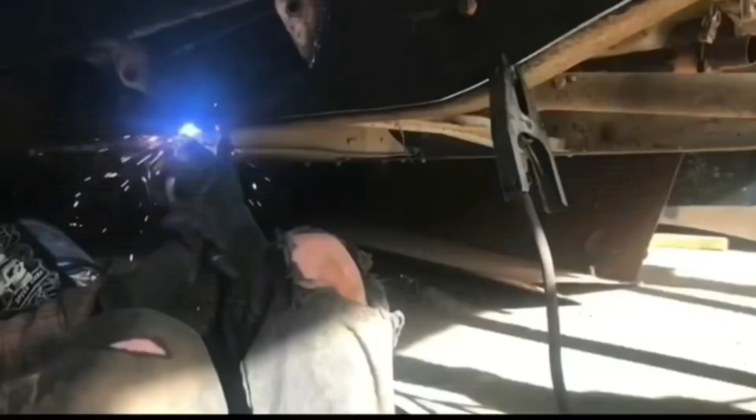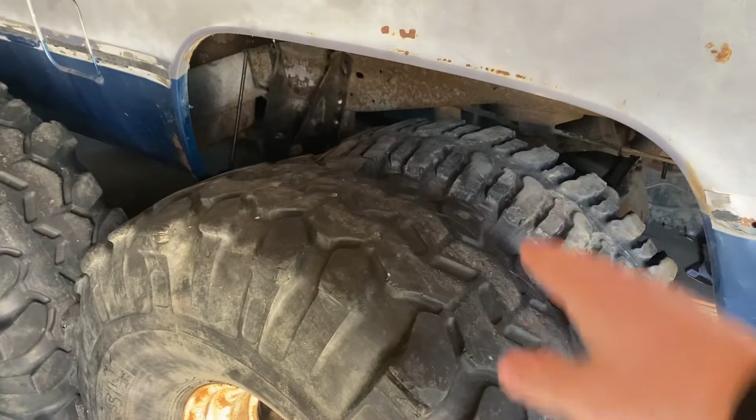But first, check out these I got for it. Now they're a set of 40s, even though they sit about the same height as the 38s. Got them for super cheap. First thing you'll probably notice, wrong bolt pattern. These wheels are no good for them, but they are 15s, so they will fit my nice chrome ones.

So I'll just have to swap them over, and then I think I'll clean up these wheels and try to sell them. The problem I noticed, as soon as I started bringing these home, is that one's different than the rest. I got 3 like this with the 8 spoke, and 1 like that with the 5 spoke. But I should still be able to clean them up, powder coat them or paint them, and go from there.

These are kind of bald. I mean, by kind of, I mean really. They're right down to the wear lines. I'm okay with that though, because I got them for super cheap, and they're just to kind of fit the truck, just to sell it.

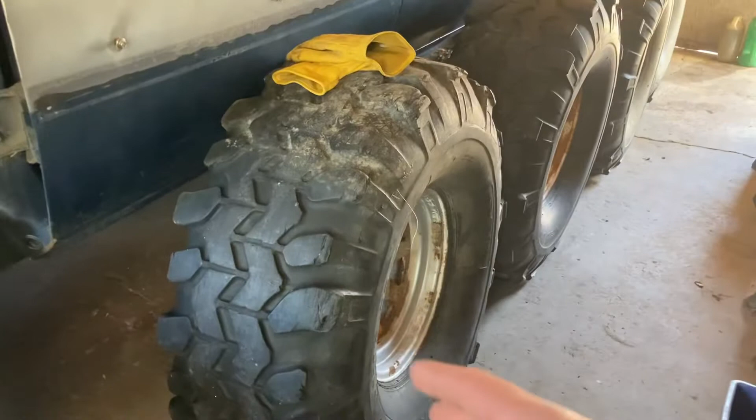I kind of noticed that with vehicles, if you're looking for a little tip to sell something that's a big lifted truck, have some big tires on it. Don't have it on the dinky tires. People think it looks stupid and they tend to not buy it. Even if they're big bald tires, they can see the potential and the sheer size of it. It changes the size and the whole look. So I try to put some on.

A couple other things with these, they could be re-grooved. I could take these lugs out. I could cut this down, take out every other lug here or something. They're super swampers, and there's lots of ways to cut super swampers. I've never actually cut tires before, but I've seen a lot of it done. So maybe that's something these hold in the future.

Another thing is, if you remember, this is just a Dana 44, and it's a very heavy truck with a torquey motor. So I don't want lots of grip, at least not in the front. Normally, I don't know how true this is, but I've always been told you want your best tires on the front. Normally that's how I roll, but with these, I think I'll pick the baldest 2 and put them on the front so it doesn't grab as much there. I want as much traction on that 14 bolt as I can get, and minimal traction on the Dana 44. So I'm kind of thinking for selling wise of the truck and functionality wise if I keep the truck.

These aren't really cracked, except one, of course, the one I'm looking at. I haven't seen any cracks on any of them, so they should be okay for the road, except for this one. It's got this nice, horrible crack here. It's on the back too, so I think this one was flat at some point.

Other than that, they're pretty good, and apparently they hold air. I think that one's flat right now. You can see it's kind of flat on the top, and these ones are round out. But it is what it is. If I do drive this on the road, I'll maybe put that on the right rear. Hopefully have some better tires by then, if I keep this.

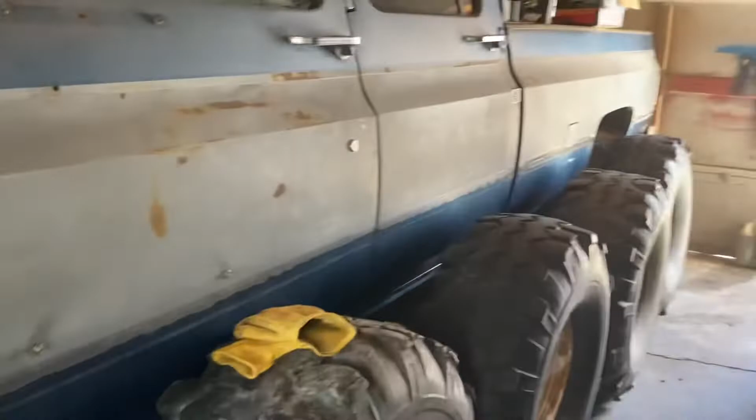But for now, got to swap these over and got to get the truck back together. I'm going to move these out of the way, and then we'll figure out a list of things I got to do on this pile to get it going. Or probably not even going, just at least somewhat together, a little more sellable.

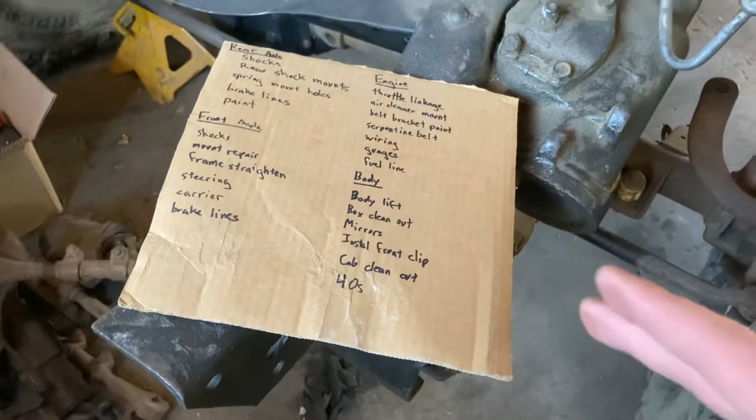Well, she's a long list, and that's not even all of it. That's just kind of what I want to get done here in the near future. And that's not even to get it running or driving on the road. That's not even the tow truck part. That's just

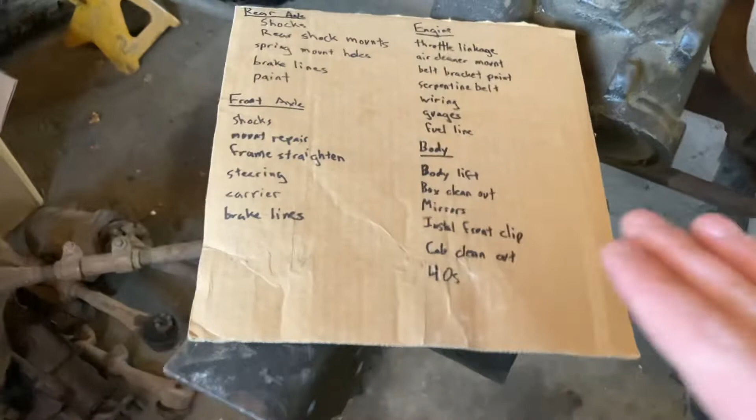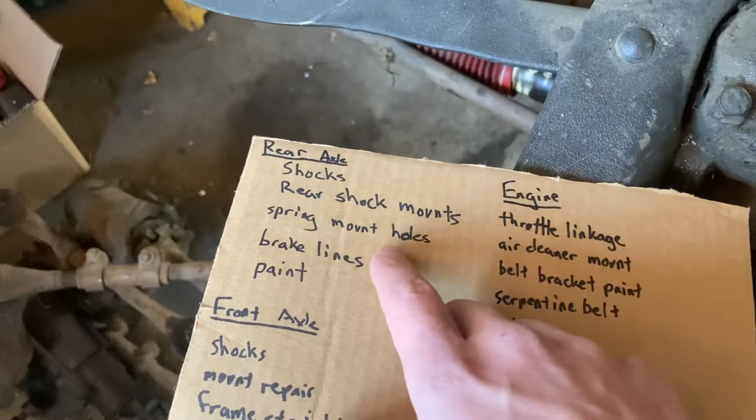step 1, I guess. At the rear of the truck, we got to do shocks, but first we got to do the shock mounts. They're the wrong way on the axle. We got to still drill all the holes for all the brackets that hold the leaf springs on. I do brake lines, and then kind of paint all the brackets and maybe even the diff, we'll see.

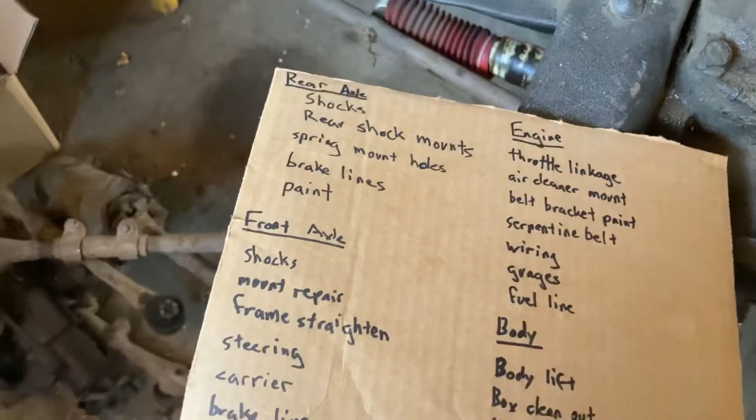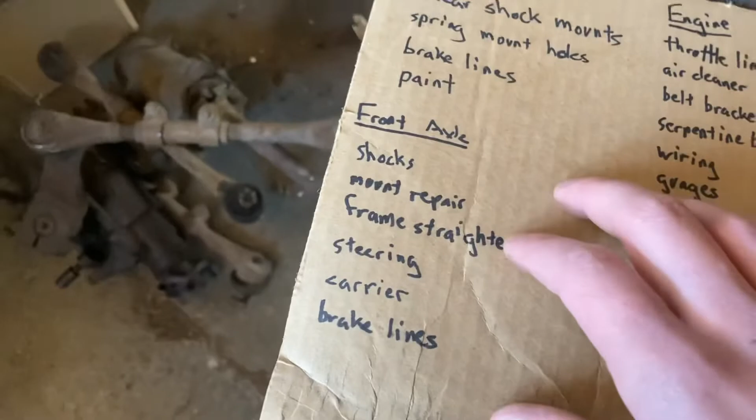Front axle, again, shocks. I gotta fix that crack. We got to straighten that frame rail, which will be done once more of the truck's put together and I can roll it outside.

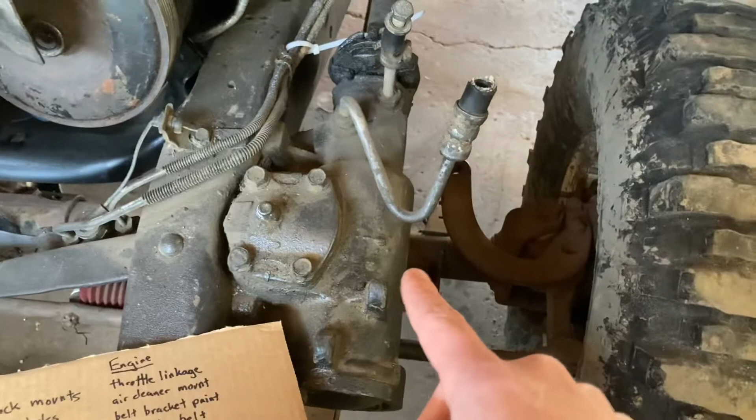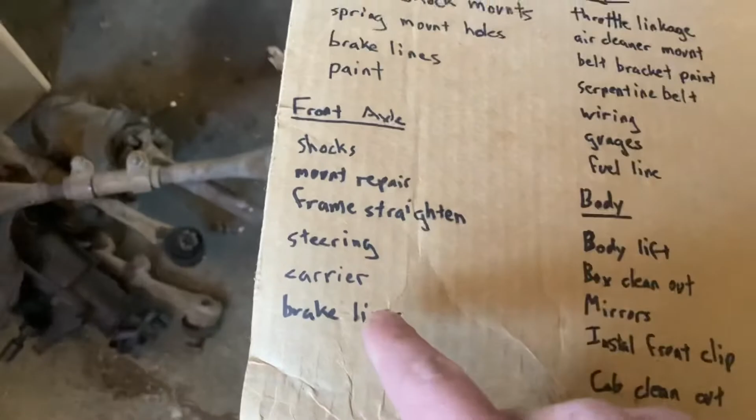We got to do the steering. It's still two-wheel drive box, and as you can see, it's not connected. The carrier probably won't get done for a long time because I need some money for that, and I don't have any.

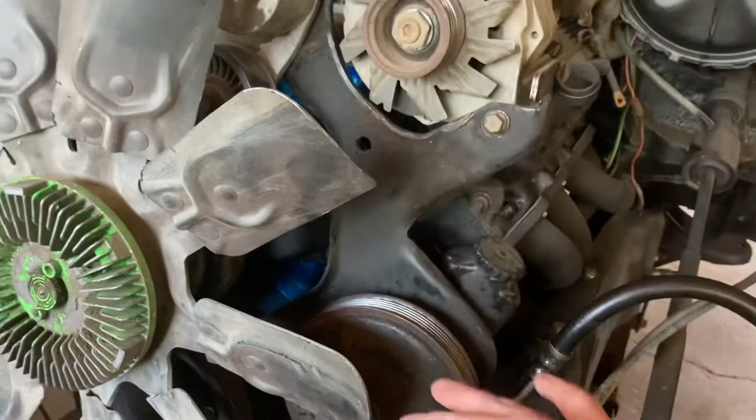And then brake lines. The engine, I gotta do the throttle linkage, air cleaner mount, belt bracket, paint, because all that's crappy. I'd like to clean it up. We gotta do the serpentine belts, all the wiring, the gauges, fuel lines, and then we might be able to fire it up after that.

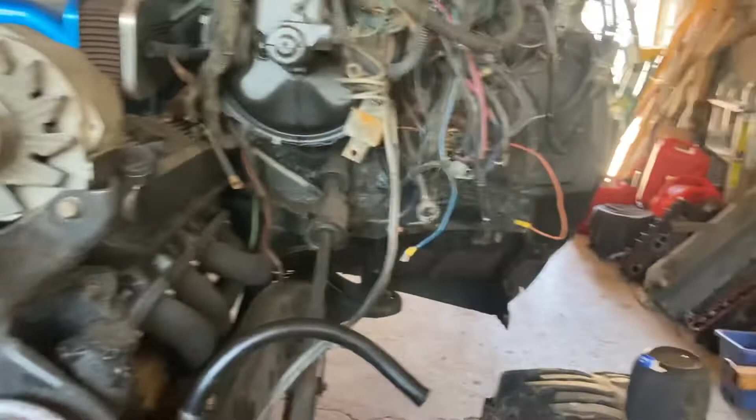So we might get this running, we might not for now, I'm not sure. It's still really cold in here for a cam break-in, so probably not yet.

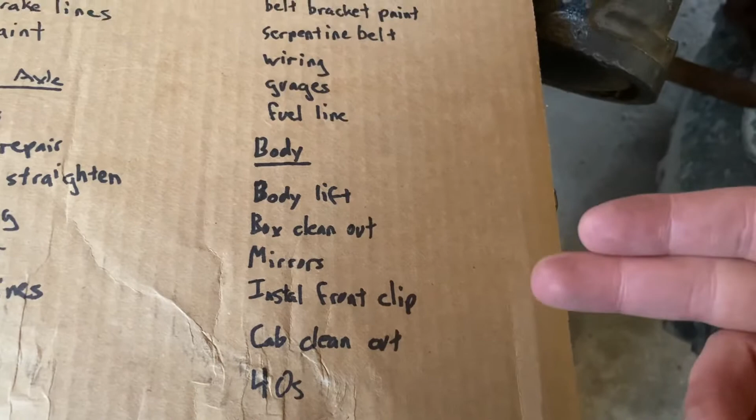And then for the body, I gotta do the body lift. I gotta get all the crap out of the box, and all the crap out of the cab. Mirrors. I'm gonna install the whole front clip so the truck's complete, and then put on the 40s I just showed you at the beginning of this. So we got a lot to do.

I guess let's pick one thing and get going. First thing on the list I think I'm gonna try to do is the steering box. Shouldn't be too bad. It's 4 bolts, 3 or 4 in the frame, and 2 on the rag joint.

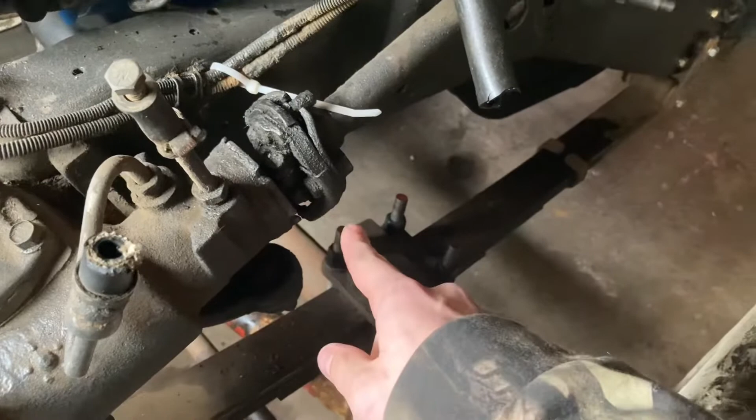A lot of times these ones have given me trouble, and then it should just be drop that off, bolt the new one on, run it into there, and it should be good in theory.

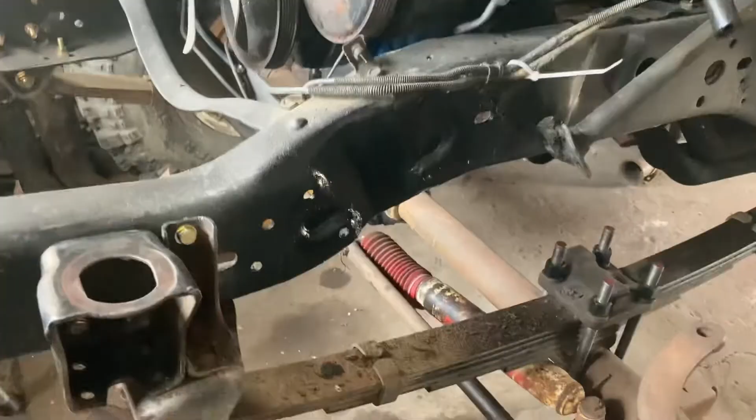Came apart nicely without really any issue. I had to tap on the one bolt with a hammer to let it go, but other than that, it came out nice and gentle.

I touched this up with some rocker guards so it can match the rest of the frame. When I get closer to being all finished with this, I'll touch up the front of this again.

So while that's drying, I'm painting the steering box outside to keep fumes in here minimal. And while that's drying too, I think I'm gonna start working on the front end.

I need to unbolt these again so I can paint them and fix that one. I could do it on the truck, but I'd rather take them off and paint them because then it looks nice on the inside and stuff, and it's less likely to rust. Plus I gotta redo all these nuts anyways with the nylocks.

So might as well just do it all in one.

New box is in. It looks so much better than that pile of crap there.

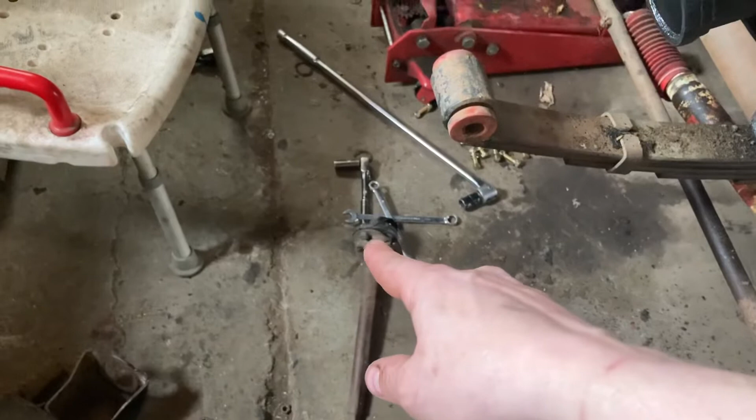I did have to switch the rag joint though. Now I understand why those bolts are not undone and they cut here on the column, because I could not get those off without stripping them out.

So I decided since it's only one bolt you can take that off, and it's actually a lot easier than doing the rag joint bolts. I should have just done it that way. Plus the rag joint from this truck was in a lot better shape anyway, so it worked out for the best.

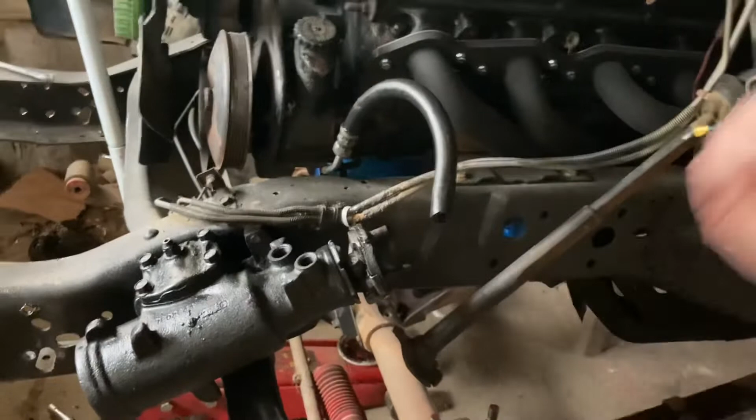I have not put this on yet. It's kind of hard to get it on there, but I'm not going to fight with it or take this off, because I still got to do the body lift, which brings this 3 inches higher. So it's about 3 inches lower right now. I'll raise it up and then I'll have the movement in there. I can tuck it in, put it in. But for now, it'll just sit there like that.

I gotta take this one off because this one is crap, as you can see, and I have another one right there. Oh, actually sorry, that's the one on that steering box. I have another one right there that we'll put on.

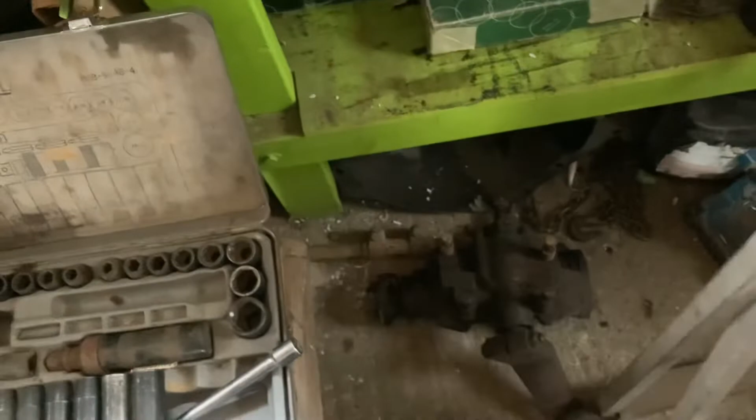Well, that's all connected now. Don't forget your cotter pins.

Now before anybody says, oh, why didn't you keep the two-wheel drive one and do a crossover, that is the better way to go. Everybody actually wants to put the two-wheel drive boxes in their four-wheel drive so they can do the crossover, because the pitman arm is back here and shoves it this way and this way, not over here going this way and this way.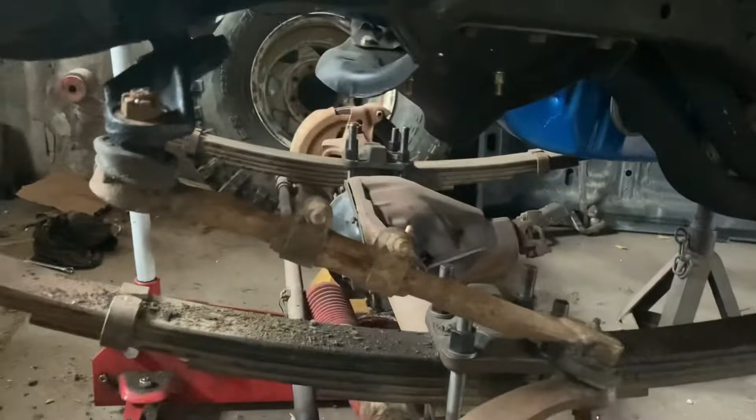This one was already set up like this. Crossover steering is expensive, and I'm not going for a super fancy rig or anything. There's nothing wrong with this setup. I know it causes a little bump steer and stuff, but for me that's fine, I don't really care. Plus I'm on a tight budget, so it's kind of whatever I have in the garage that I'm using for the truck. But there it is.

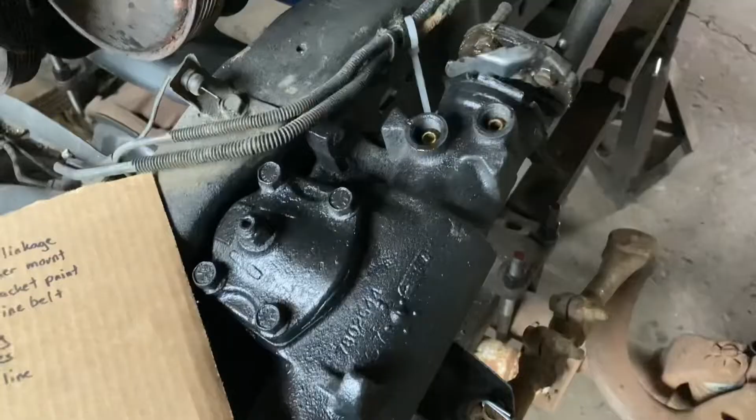We have steering. I know it's not completely done because I still need hoses and I still got to connect that, but I'm going to count that done.

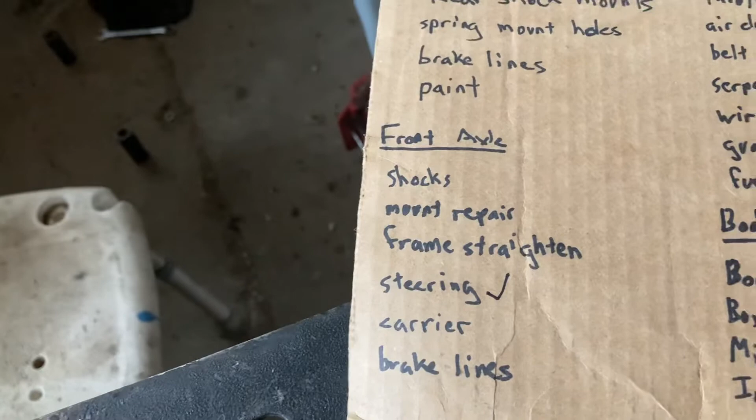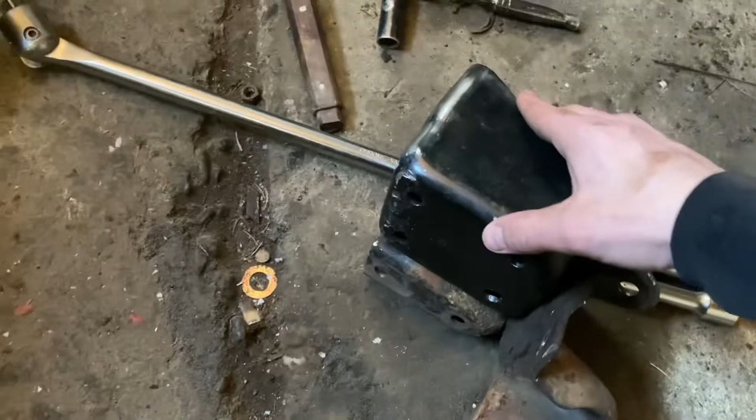Done. Well, I guess the next step with this thing is to clean those up to paint them. This one, I gotta grind down a few little places where I marred it trying to get it off the donor truck frame, but that shouldn't be too bad. And then I'll paint that.

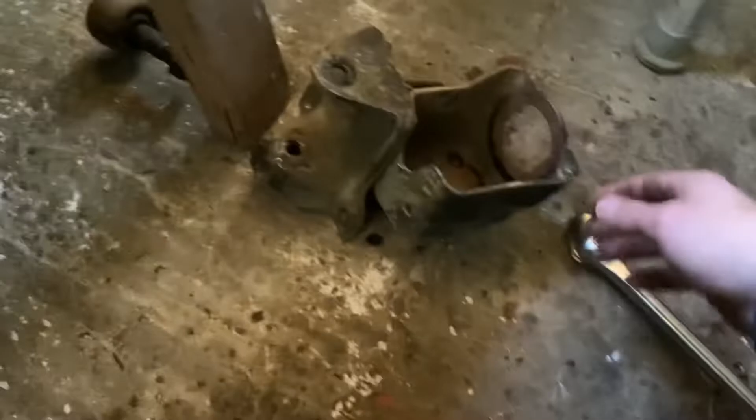And this one, still gotta fix that. What we'll do is drill a hole right at the end of it to stop the crack, then cut this out with a zip disc, try to get a little bit more penetration in there with the weld. Then we'll run my welder on it, even though my welder's still not fully functional.

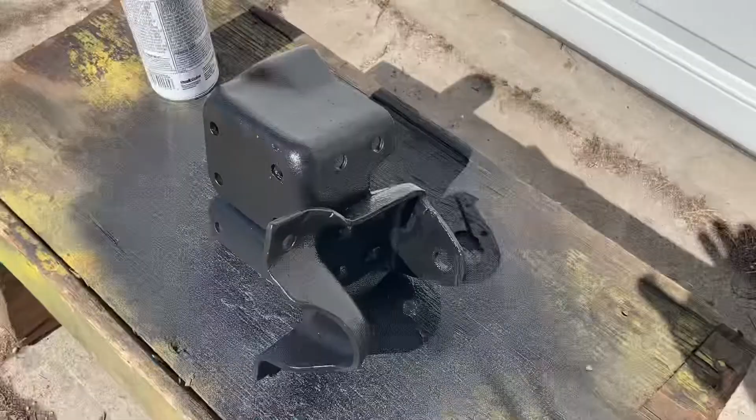But should be fine enough for that. There, that looks a lot better. While that one's drying, let's go fix the other one.

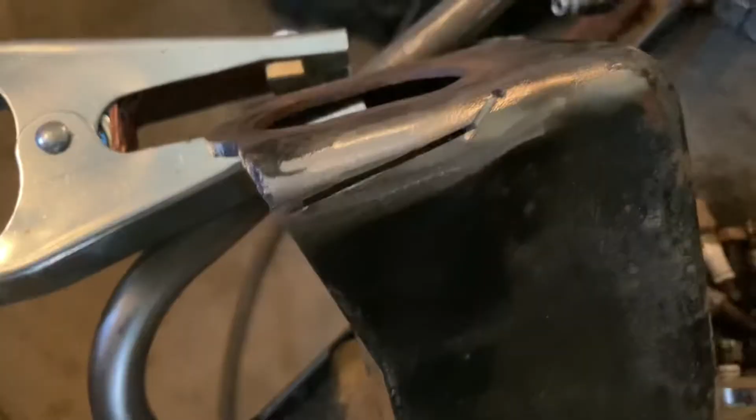Zip the line right through it, except for right there. Right there's not all the way through because I didn't want to dig all the way up here or all the way down there.

Should be okay. So I really got to start leaving my helmets inside - left them out over winter, both of them are dead. So I got to weld it with the helmet not dimming, which was fun, especially with a welder that's not working properly. So I think I did all right.

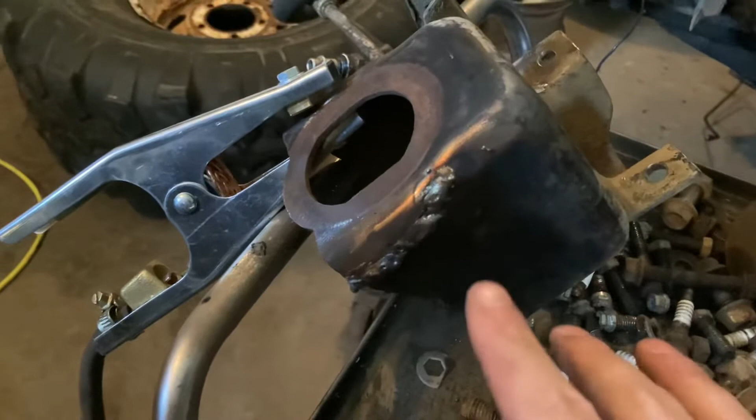My eyes still haven't adjusted from welding without a dimming helmet, so you guys are going to have to let me know how I did. Can't even tell that there was a crack.

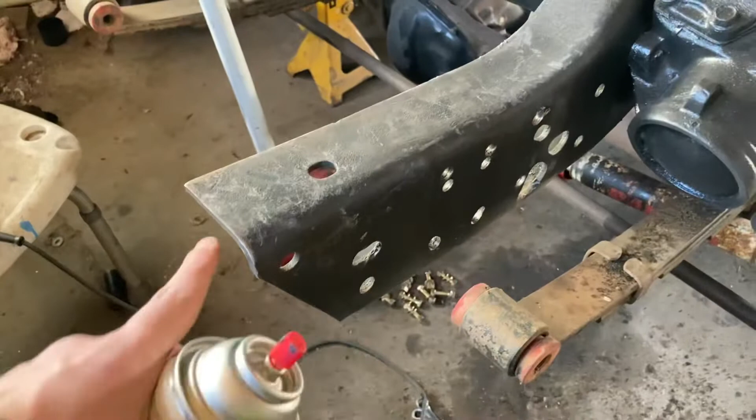I'll wire wheel this off, clean it all up nice, and then paint it just like the other one. And I should really stop using this as a workbench. These were nice and painted if you remember previous episodes.

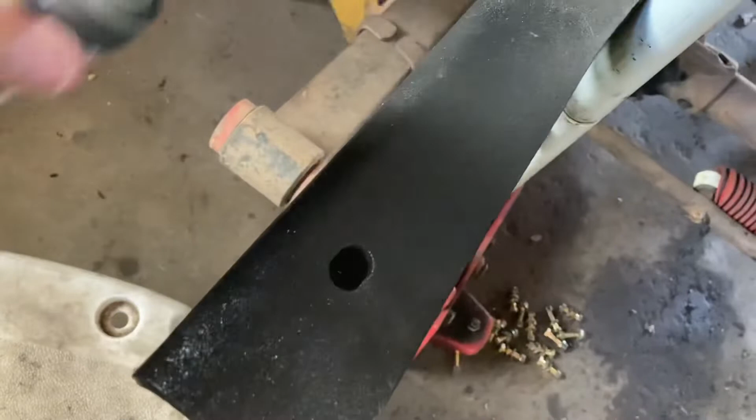So while the other parts are sitting outside drying in the sun, I might as well paint this up too. The stand. Jack handle, all over sprayed while I'm at it. A little more there.

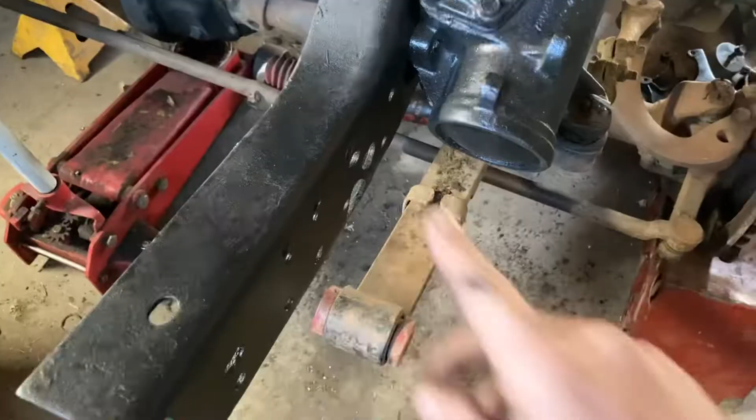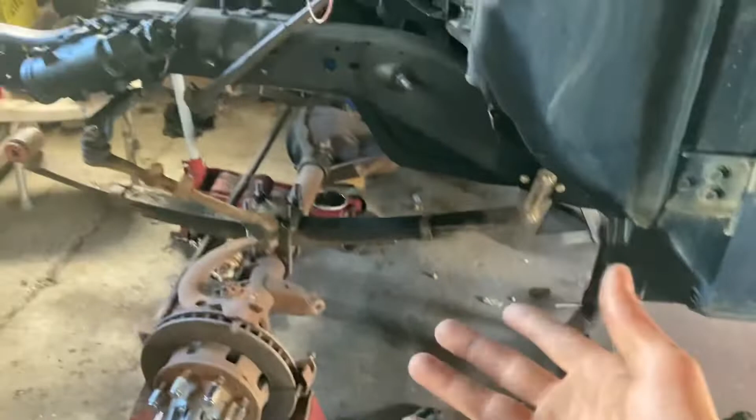There, clean again. While waiting for all the paint to dry for this stuff, I took all that apart. It's all there, and there, and under there, and over there. Because if you haven't figured out yet, I've got like major ADD that's not medicated. Never been to the doctor for it, but I mean, can't really argue that I have it.

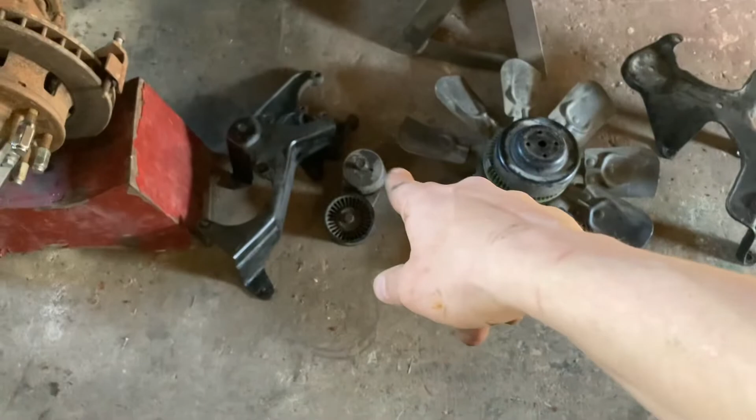But anyways, yeah, most of this I'll paint, some of it I won't. Like that, I'll just clean that up. There's a little bracket that goes in here, it's over here, that thing. It looks like I can just kind of clean that up.

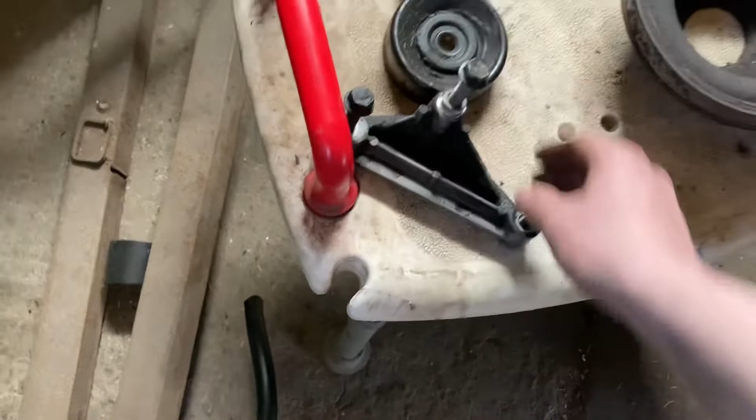Paint everything out, back on and looking good on both sides. I just put the truck on these blocks so it's sitting all level, which, with it sitting level, steering angle is nice. I'm happy with that.

Might need to be a little shorter. It's turning a little that way, although that might be just the way it's sitting. I'll have to check that all out once I get the steering wheel connected. I'd like the steering wheel to sit straight when the tires are straight, obviously.

Now, another reason why I wanted it to sit all level but on its weight without the tires here, so we can measure for some shocks and get them in there.

Normally you'd cycle through the whole suspension and measure the shortest and the longest, but since I got a whole bunch of different lengths of shocks, I'm just going to measure this length and then find a set that's kind of in the medium range of them, so they got some compression and some expansion. Then we'll clean them up, maybe paint them, maybe take that one off, clean it up and paint it, and then we'll put those back in, and then the front's getting there.